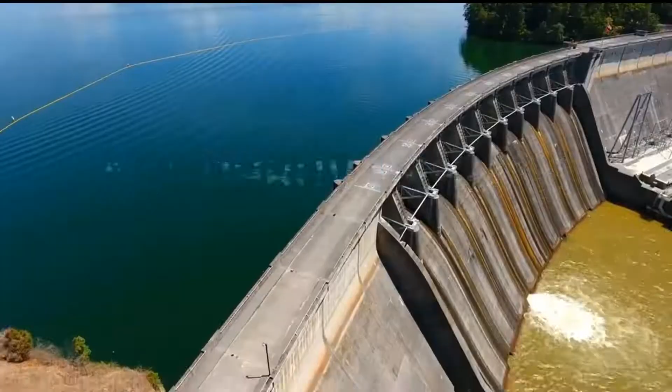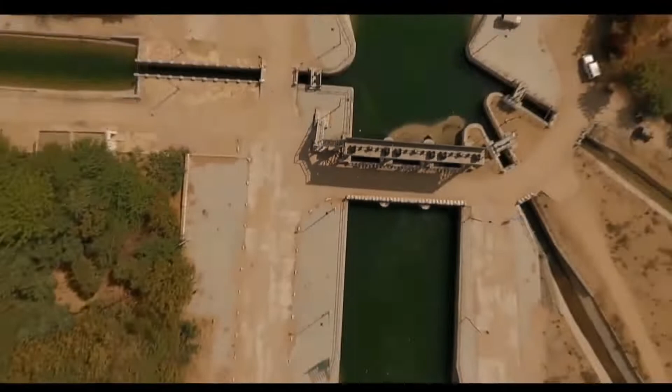In the previous lecture we studied what is irrigation and irrigation engineering, then the necessity of irrigation, and then the scope of irrigation engineering. In this lecture we will study the benefits or advantages of irrigation. There are plenty of benefits of irrigation.

The first benefit is increase in crop yield. Irrigation means an artificial process of supplying water to crops. With the facility of irrigation, we can supply water timely, periodically, and in a controlled manner. So obviously we get maximum crop yield, or maximum crop production, because we supply water in a controlled and timely manner.

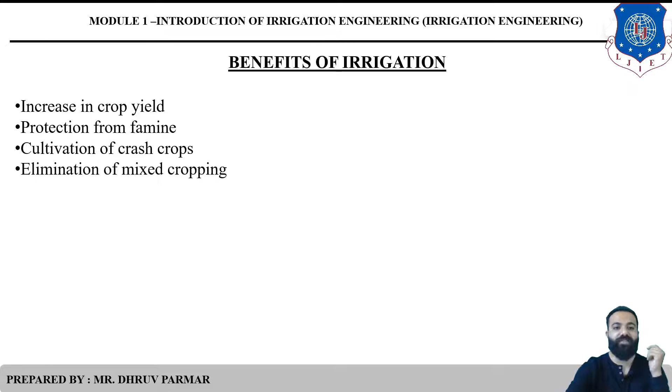The fourth benefit is elimination of mixed cropping. If irrigation facility is not available, farmers have a tendency to grow several crops in a small field. For example, a farmer grows three types of crops: A, B, and C. The water supply amount, atmospheric conditions, soil, and manuring systems differ for different crops. Say crop A needs 15 centimeters of water, crop B needs 60 centimeters, and crop C needs 70 centimeters. But the farmer supplies only 60 centimeters of water, so crop B grows well, but crop A and crop C wilt and die. With irrigation facility, we can supply water in a controlled manner according to each crop's requirement, so mixed cropping gets eliminated.

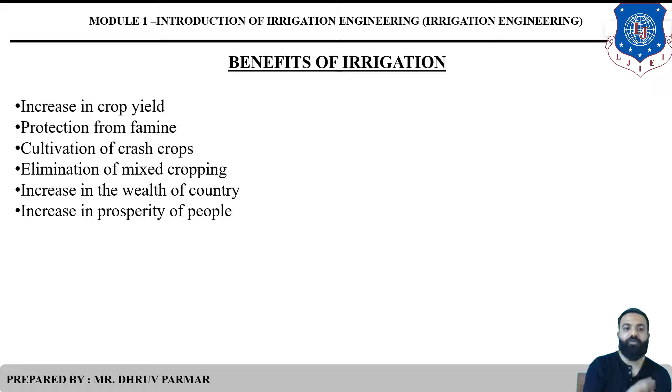The next benefit is increase in prosperity of people. A location with irrigation facility has more land value compared to one without it. Farmers grow more crops and get maximum revenue from the irrigation facility, so people's standard of living and quality of life increase due to irrigation.

The next benefit is generation of hydroelectrical power. In valley projects like the Sardar Sarovar Dam, there are hydroelectric power plants to generate electricity. So by irrigation or the construction of dams, we can generate hydroelectrical power for the people.

The next benefit is domestic and industrial water supply. If domestic and industrial areas lack water sources, the government or state supplies water through the construction of canals, so domestic and industrial users get water from the irrigation facility.

Then there's inland navigation. Inland means within the country. Through the construction of canals, especially large canals, we can access one place from another. So the canal becomes useful for transportation or navigation, allowing farmers to transport crops from the agricultural field to mandis, meaning the vegetable market or wholesale market.

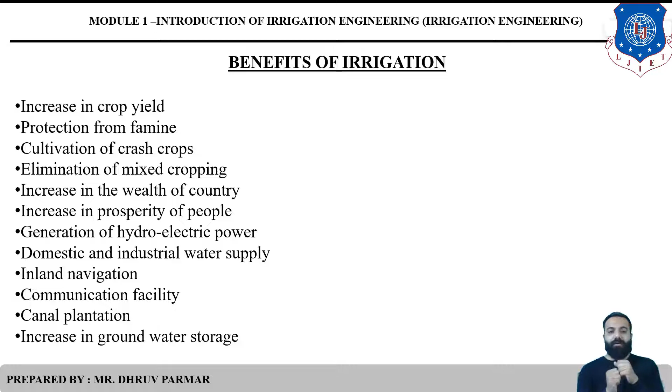And the last one, increase in groundwater storage. In a later chapter, distribution work, you will study there are two types of canal: lined canal and unlined canal. In unlined canal, the water percolates to the ground, so obviously the groundwater storage, otherwise groundwater table, will be improved. But in lined canal, there is no percolation, no infiltration, so the groundwater table will not rise.

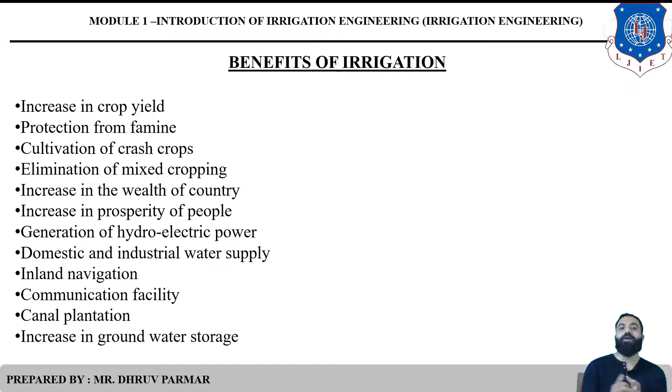But in unlined canal, also called alluvial canal, the water will percolate and infiltrate into the ground, so the groundwater table, or we can say groundwater storage, will be increased. So there are lots of advantages of irrigation.

So the next one is ill effects of irrigation. What is an ill effect? Otherwise we can say disadvantages of irrigation. If irrigation water is used properly in a scientific manner, there are no ill effects of irrigation. But if we use excess amount of water, not in a scientific manner, then disadvantages, or ill effects, will occur due to irrigation facility.

So the common ill effects of irrigation are: first, waterlogging. What is waterlogging? A waterlogged area means that particular area will be covered by water. When we supply water to the ground, the water table increases and reaches near the root zone of the crop, so the soil voids become fully saturated and the normal circulation of air in that root zone of the crop is stopped.

We know there are three requirements to grow a crop: air, water and soil. In waterlogged conditions, the air circulation will be stopped, so the growth of the crop will decrease or stop, and then the crop will die or wilt, so that land will become useless, futile for irrigation. So that is called waterlogging.

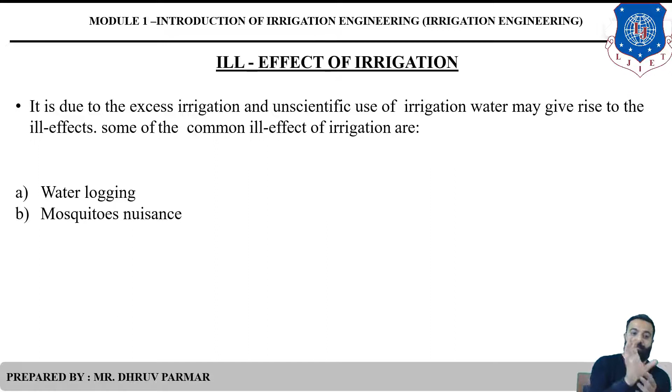The next one is mosquito nuisance. Due to excess application of water and leakage from the canal and pipe, pits, holes and depressions get filled with water. You know that pools and depressions are very useful for mosquitoes, because they act as a breeding place for them. So that region becomes malaria prone. This is mosquito nuisance due to leakage from canal and from pipe.

Then the third one, damp climate. Consider an area like near Ahmedabad to Gandhinagar. That area has its own ecology or environment, obviously cold, clear and damp. But due to construction of the canal, that area becomes colder and damper. So this is damp climate.

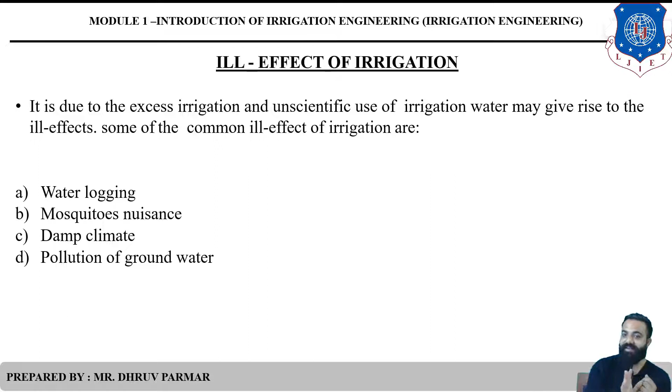Then the fourth and last, pollution of groundwater. Due to evaporation, lots of water gets evaporated, about one half to two thirds of the water applied to the irrigation field evaporates. So the remaining amount of water acts as return flow. That return flow has a higher concentration of salt, including nitrates and phosphates, and these nitrates, phosphates and salts come from the fertilizer. Due to addition of these contaminants, the irrigation return flow becomes polluted, and after that the groundwater and also the river become polluted due to these contaminants like salt, nitrate and phosphate. So there are four ill effects, otherwise disadvantages, of irrigation.

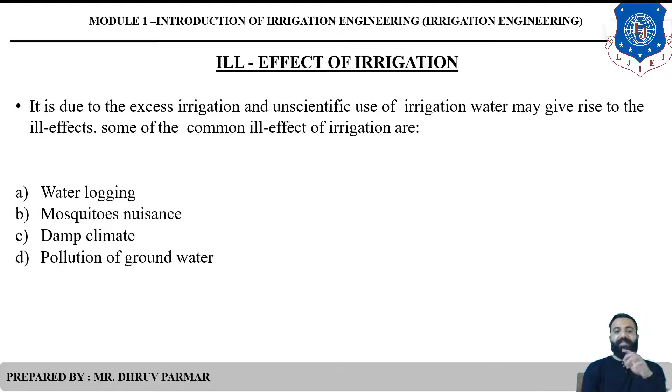So the next topic is types of irrigation system. There are lots of types. First, flow irrigation, then lift irrigation. Flow irrigation is further classified into three: perennial, as per source, and inundation irrigation. As per source, there is further classification into direct irrigation, storage irrigation, and combined irrigation, which is direct plus storage. The second classification, lift irrigation, is further classified into well irrigation and lift canal irrigation. We will discuss these in detail.

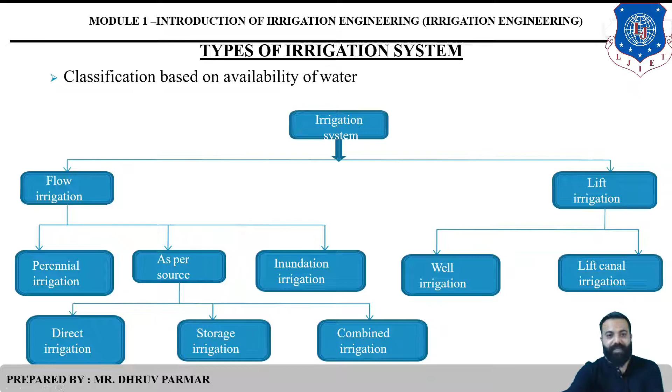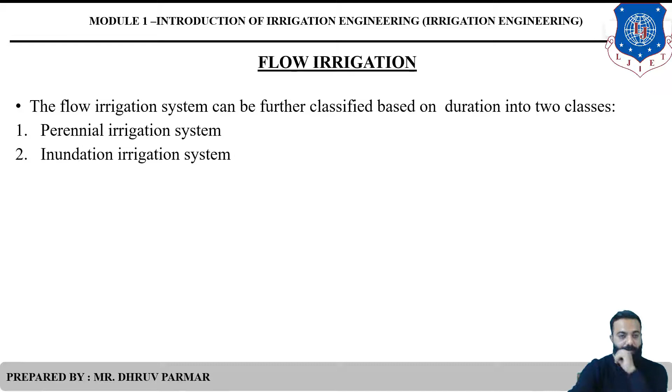So first, what is flow irrigation? In flow irrigation, the water is at a higher level, so that water is conveyed or distributed by gravity flow. This scheme is useful when the irrigation water source is at a high level or high height. Then we use flow irrigation. In flow irrigation, there are two types: perennial irrigation and inundation irrigation. In perennial irrigation, water is supplied as per the crop requirement, otherwise at regular intervals throughout the crop period.

So what is the period we will discuss in next chapter? Crop period, base period, etc. There are lots of definitions in this second chapter which is very important for you.

In perennial irrigation system, water is supplied as per the crop requirement at regular intervals. So in this system, there is control on the water supply.

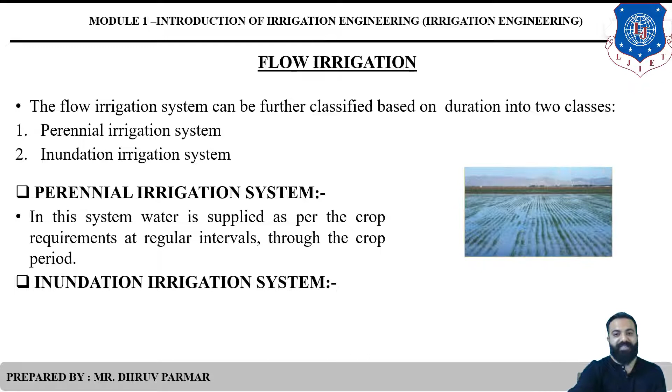The second type is inundation irrigation system. Here, large quantity of water flowing in a river during flood is allowed to flood or inundate the land to be cultivated. There is no control or regular interval to supply water. A large amount of water is directly supplied to the particular agricultural field where the river floods. So a lot of water drains off beyond what the soil capacity requires and can infiltrate. So in perennial irrigation there is control on water supply, while in inundation irrigation there is no control of water supply.

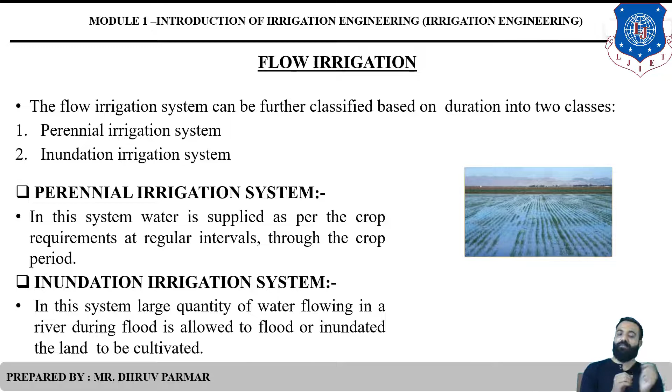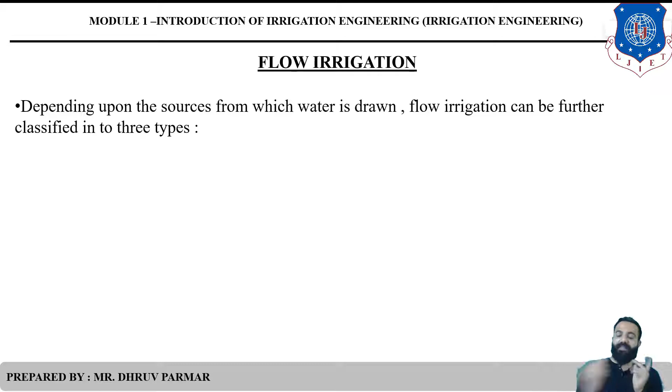Again, depending upon the source, irrigation is further classified into three types: direct irrigation system, storage irrigation system, and combined irrigation system.

What is direct irrigation system? In this system, there is no storage of water. Water is directly diverted to the off-taking canal. A low height weir or barrage is constructed to divert the particular water to the off-taking canal. In this system, there is no storage.

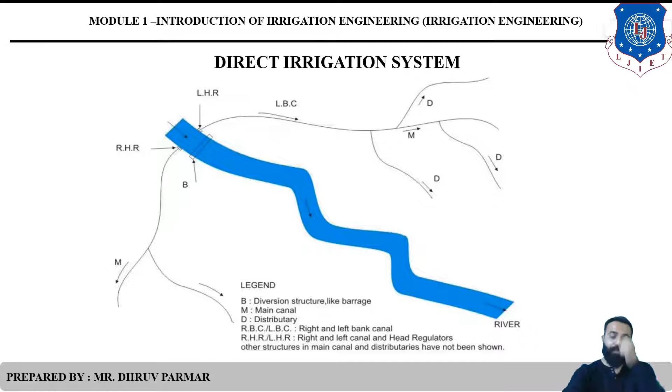This system is useful for a perennial river, when water is flowing throughout the year. So at that location we use direct irrigation system, for example, Vasna barrage.

The second one is storage irrigation system. In this system, a solid barrier like a dam or a high height weir or barrage is constructed to store water. After that, a particular amount of water is diverted into the canal from the upstream side of that dam, weir or barrage.

The diagram looks like this: in this system, canals are off-taking from both sides of the upstream side. RHR means right head regulator, after that there is the right bank canal, then the left hand side canal is provided.

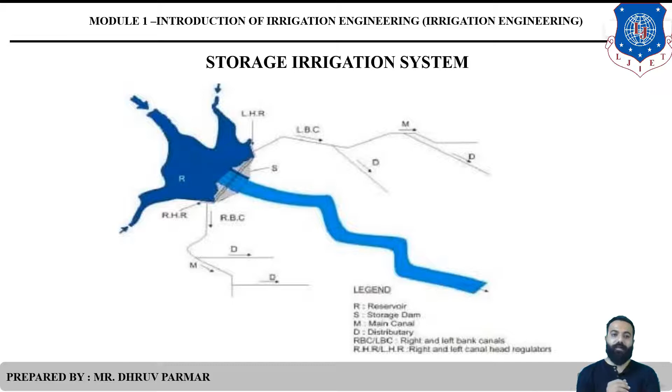The next one is combined irrigation system. This has a combination of direct as well as storage systems. It is useful for non-perennial rivers. A dam is constructed, but there is no canal takeoff from the upstream side of the dam; instead, the canal takes off from the downstream, further downstream side of the irrigation works.

So there are no canal takeoffs from the dam side. On the downstream side we have RHR, LHR, LBC, RBC. Small height structures are constructed, and then the water is diverted into the canal. This is called the combined irrigation system, useful where valley projects are there, like the Sardar Sarovar Dam. This system is very useful for development of hydroelectric power plants.

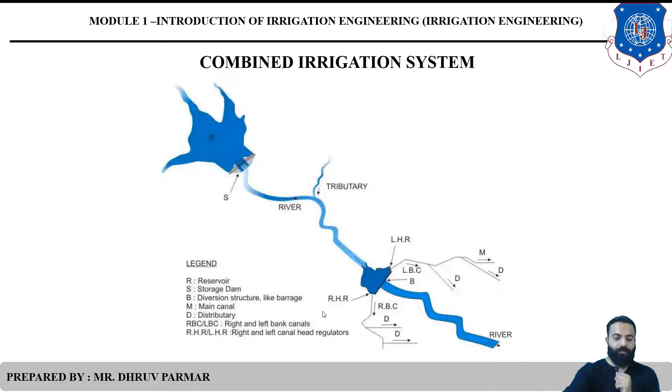Then there is the lift irrigation system. This is useful when the water supply is at a low level, not high enough to run by gravity flow to the land. So in this system, water does not flow by gravity. Because the water level is low, a pump is used to extract the water from the low level to the agriculture field. This is called the lift irrigation system.

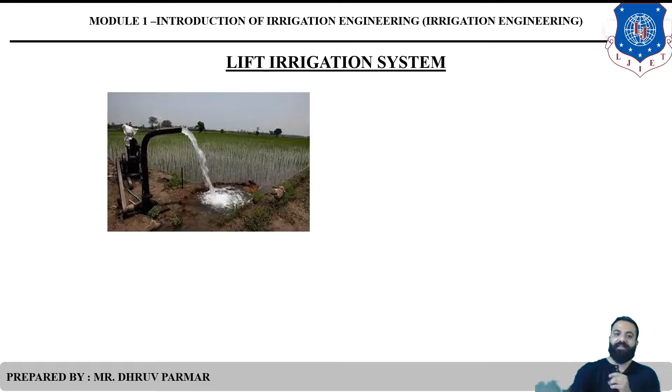Next, classification based on culturable commanded area. What is culturable commanded area? This is the area where a particular crop is grown, that is, the area that farmers grow crop on. The total amount of area is called GCA, gross commanded area, which equals culturable commanded area plus uncultivable area. Uncultivable area means the area where crop is not grown. So crop grown area plus crop not grown area equals GCA.

So there is classification based on CCA. First one is major project, where CCA is greater than 10,000 hectares, or we can say 100 kilometer square. That project is called major project.

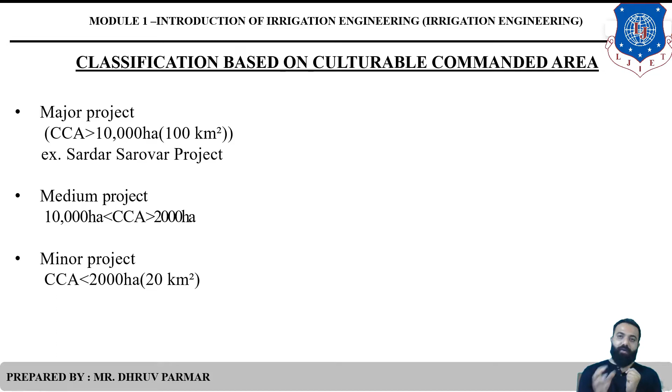Next is medium project, when the CCA lies between 2000 hectares to 10,000 hectares, or 20 kilometer square to 100 kilometer square. The last one is minor project, when CCA is below or less than 2000 hectares, or 20 kilometer square. So there are three classifications based on CCA.